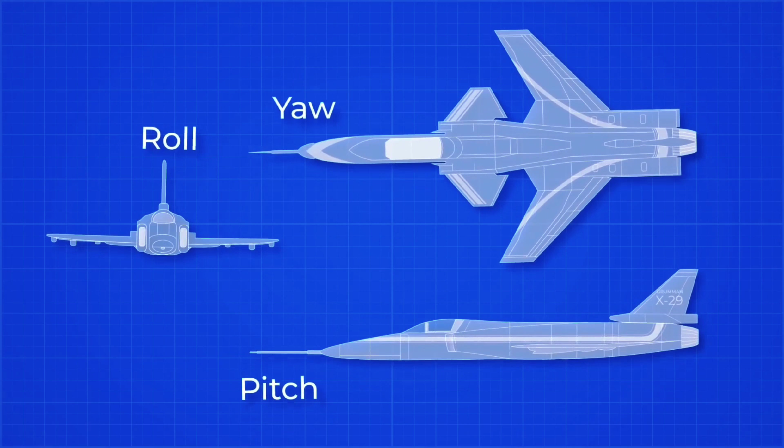So how does this apply to planes? Planes have three rotational degrees of freedom: pitch, roll, and yaw. Let's first approach this problem with regard to pitch stability, which is where the X-29 was extremely unstable. Small general aviation planes like Cessnas are designed to be very stable and so return to level flight automatically after they are knocked up or down by a gust of wind. But how do they manage this? Pitch stability is determined by three primary factors: the location of the center of gravity, the location and design of the wing, and the location and design of the horizontal stabilizer.

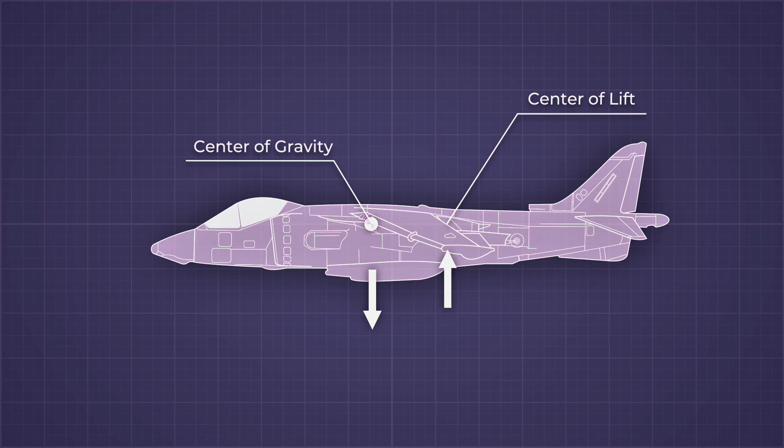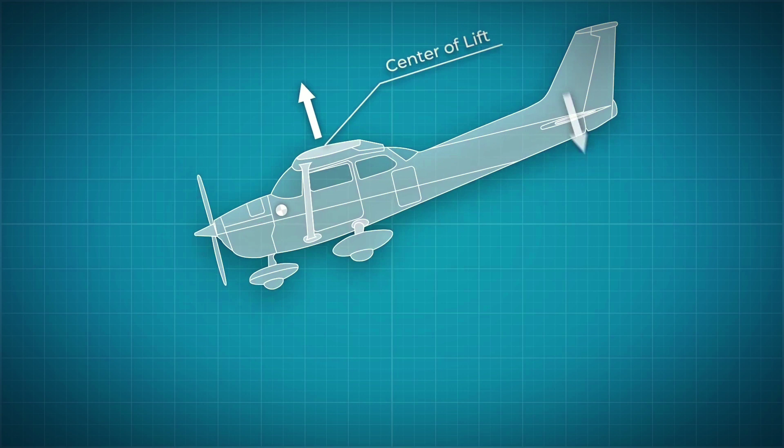The center of gravity for our Cessna is located about here. This is the point which all weight acts around. It's like the fulcrum on a seesaw. Our wing is located slightly behind it, and thus the lift it generates is slightly aft of the center of gravity. This would force the plane to pitch downwards without a counteracting downwards force further back in the plane, which is exactly what the horizontal stabilizer provides: a downwards force. This force does not need to be the same magnitude, as it has greater control authority as a result of its greater distance from the center of gravity, once again just like a seesaw. This is how a plane maintains pitch stability without any outside influences.

But what happens if turbulence knocks our plane off balance? If the forces remained the same, the plane would continue on in whatever orientation the gust knocked it into. This is not what happens. Just like our ball in a valley example, we have a restoring force to bring the plane back to its original position. This is a result of how our horizontal stabilizer's downforce changes with the pitch of the plane. There are two primary factors that influence this. The first is downwash. When air passes over the wings, it is deflected downwards. This creates a downwash of air behind the wing. This downwash strikes the top of the horizontal stabilizer, and this produces a downward pressure. The magnitude of the downforce on the surface is dependent on the downwash, and the magnitude of the downwash is dependent on the speed of the aircraft. The faster we go, the more air is deflected downwards. The slower we go, the less air is deflected.

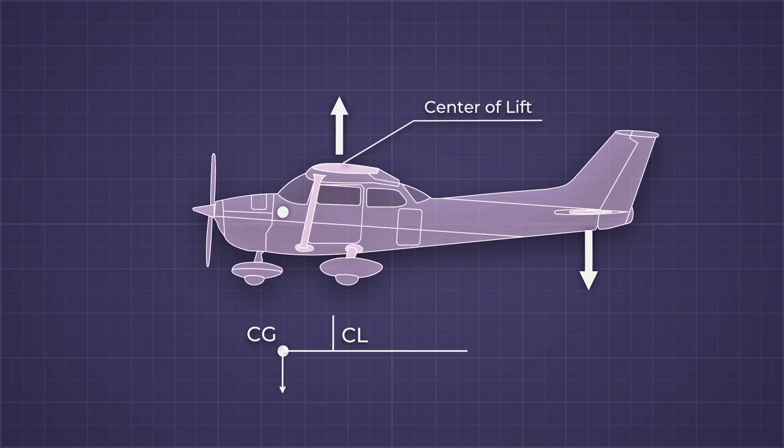Luckily, our speed is also dependent on our pitch. If the plane pitches upwards, it will lose airspeed and the downforce on the horizontal stabilizer decreases. The weight of the plane acting through the center of gravity, forward of the center of lift, now wants to move the nose down again. The opposite happens when we pitch the nose down. We gain airspeed and the downwash on the horizontal stabilizer increases, causing the downforce to increase, forcing the plane to nose up again. This explanation is often provided as a complete explanation.

But it falls apart when you consider a T-tail configured plane, where the horizontal stabilizer is lifted out of the downstream airflow of the wing. Here another factor comes into play as a result of the angle of attack on the horizontal stabilizer. Here, the horizontal stabilizer has a negative angle of attack. This angle of attack changes as the plane pitches up or down. If we pitch it up, the angle of attack decreases and thus the downforce decreases, allowing the weight of the nose to pull it back down. If the plane pitches down, the angle of attack increases and increases the downforce, which forces the tail of the plane back down.

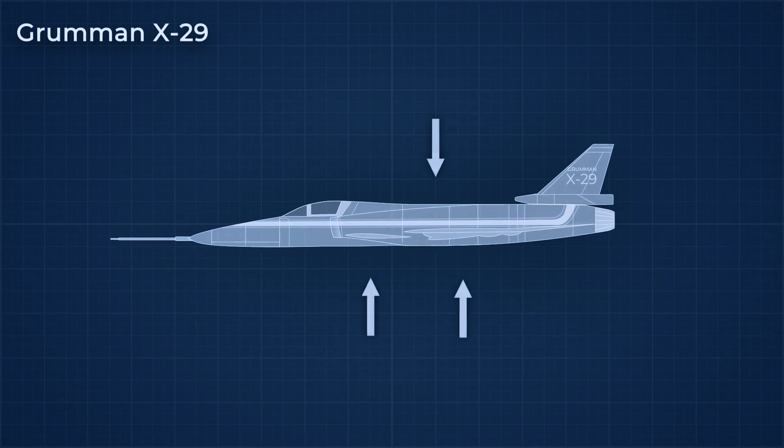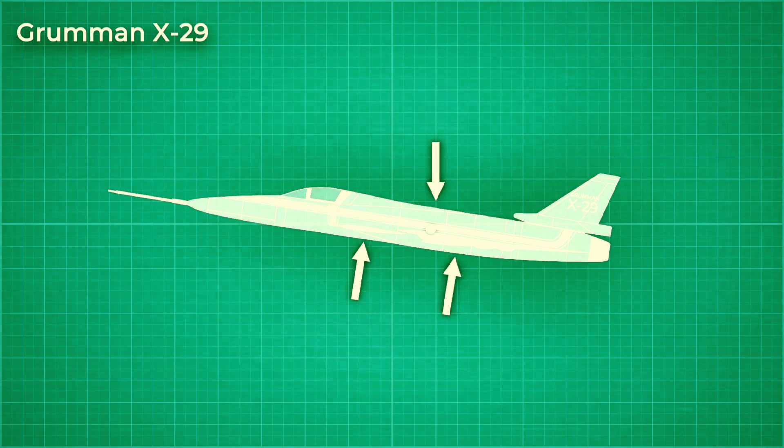This is an elegant solution to the problem, which is thrown out the window for planes like the X-29. Here we have the forces acting upon the X-29. In the forward-swept design, the center of gravity and the center of lift have shifted forwards as a result of the forward-swept wings. And thus, in order to stabilize the plane, the canards need to produce lift ahead of the center of gravity. Imagine pitching a plane upwards. Without downwash to increase downforce on the stabilizer, the nose pitches up even more with a small energy input. While this is great for wild maneuvers, it's not ideal for level flight.

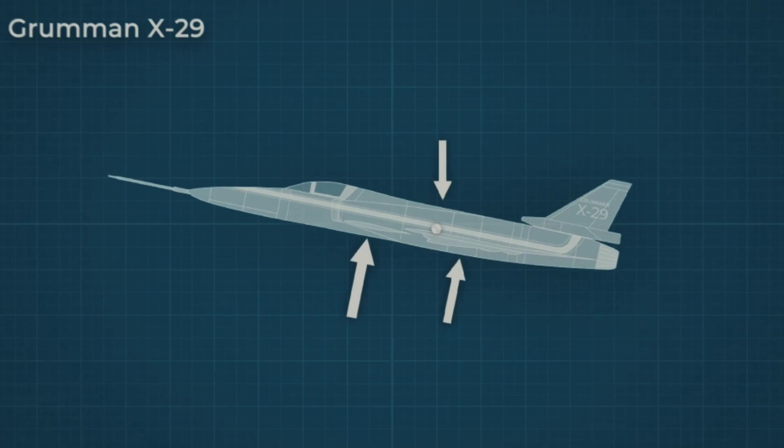The X-29's control computers had to constantly adjust for little disturbances up to 40 times a second, but that wasn't the main issue. The problem was the steepness of the hill. If we make it too steep, it takes excessive force to return to level flight. We need to balance maneuverability and energy efficiency to maintain straight and level flight. In conclusion, planes are designed to be stable and recover from turbulence without pilot intervention. Stability is achieved through factors such as center of gravity, wing and stabilizer design, and downforce.